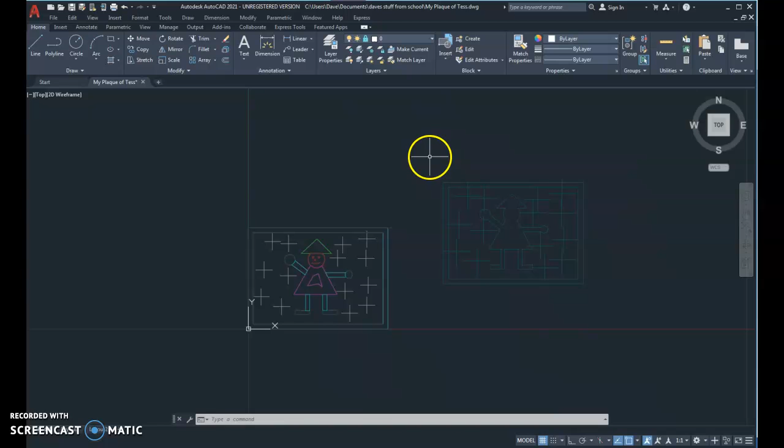I noticed that I had polar tracking on, so perhaps that was my error. So I'm just going to move this last one. You do the same thing for all the others. Right click, move it, grab the base point, roll in here nice and close, plunk it in the right spot, and roll back out, and that should be good.

So I have all of my layers now, and they're all on top of each other. I'm going to save this as my finished drawing. Remember, I already checked to make sure that all the toolpaths work. So, File and Save. Just waiting for that to come up.

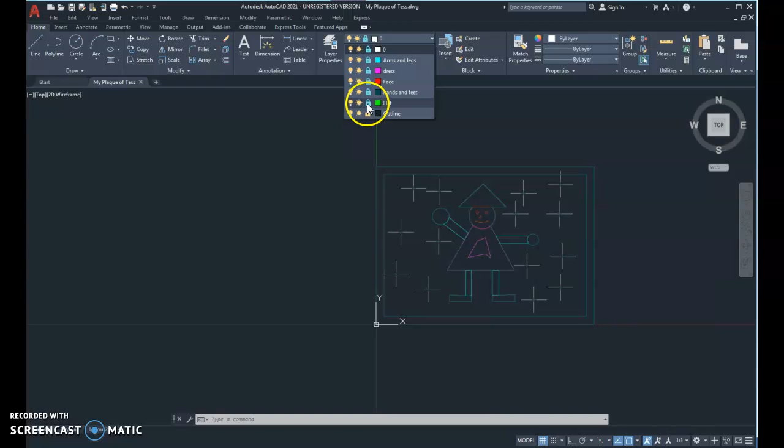So my plaque of Tess, I've got that all done now. I'm going to turn all the layers back on. I had them all locked just so I could move that last one on top. So there, now they're all unlocked.

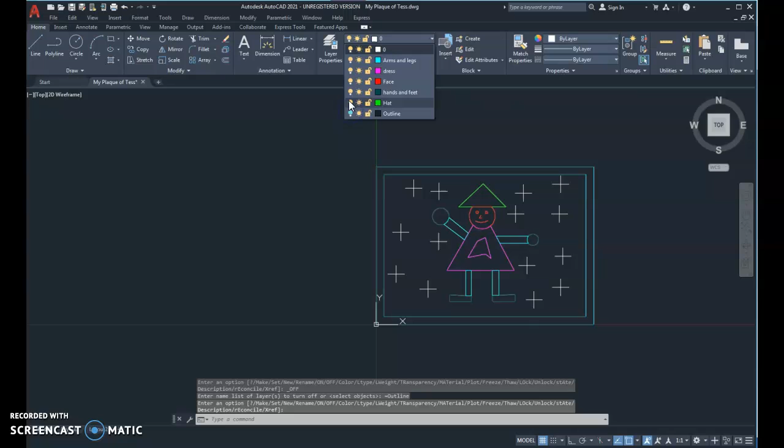I did want to mention something I forgot. You can lock layers here, and you can also turn layers off. I'm going to turn all the layers off except for the 0 layer, just for one reason. This is the original layer, the 0 layer, and we haven't touched this.

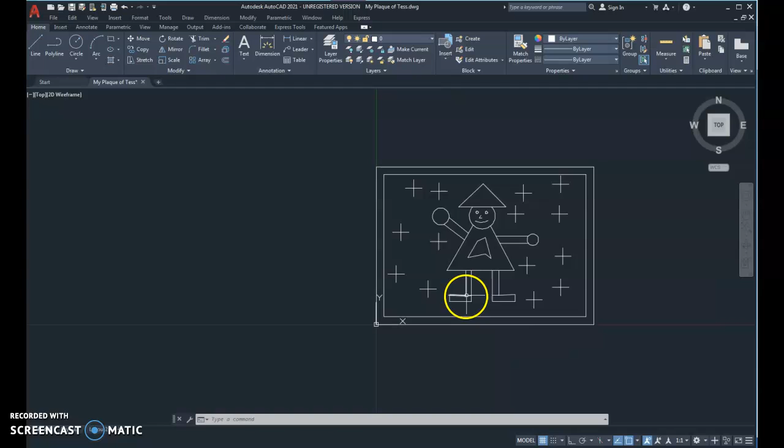One of the things you probably should do is check that all these areas in the face, any areas where I'm doing a pocket, that my tool is going to fit in there before I get to the point where I've checked all the toolpaths in Mastercam and split it all out into different drawings. I really should have said that at the beginning.

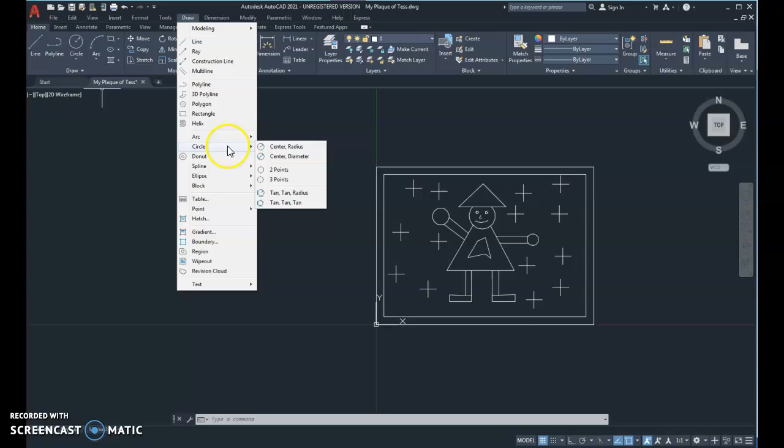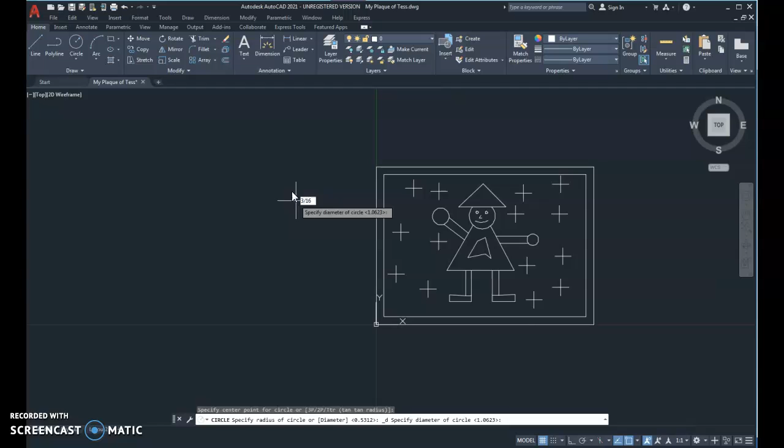So the way to do that is just to draw a circle, which is going to represent the tool. As I told you before, you can't pocket out anything if the 3/16 tool doesn't fit in there. So I'm going to click right here, and type 3/16, which is 3/16 of an inch, the smallest tool you can pocket with. Hit enter, and that is the tool.

And then I can take this tool, grab the middle, and check that it fits into these spaces in here. If it doesn't fit in the spaces that you want to fit it, then you need to make the space bigger, because you can't change the size of the tool. That's the simplest way to say it.

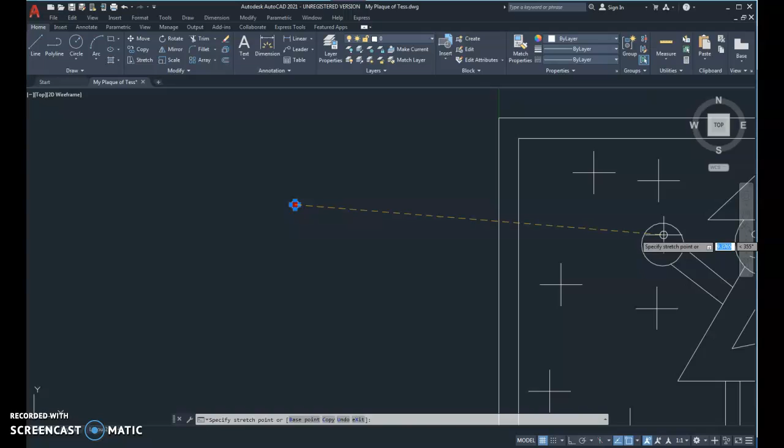So again, if it doesn't fit into the space that you are hoping to have milled out as a layer, then that part of the drawing should either be increased in size or perhaps changed to engraving, depending on the layer that it's on. Okay, so that's important.

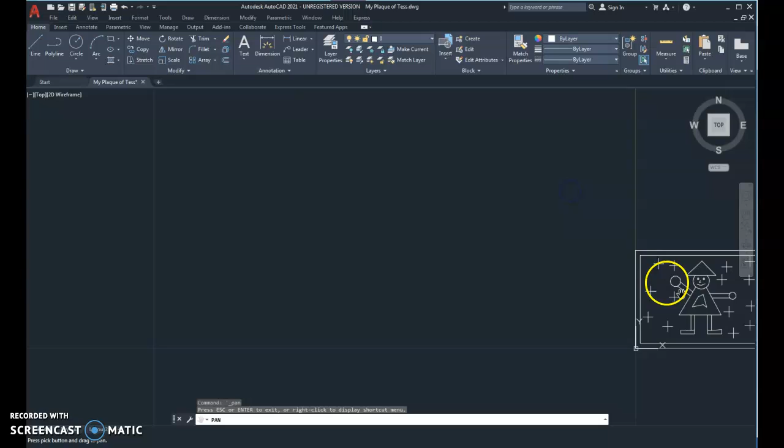So I'm just going to get rid of that, and I'm glad I talked about that. Okay, I'm going to turn all the layers back on. Hang on, I'm just going to pan back over. I right-click to get there, and then escape to get out.

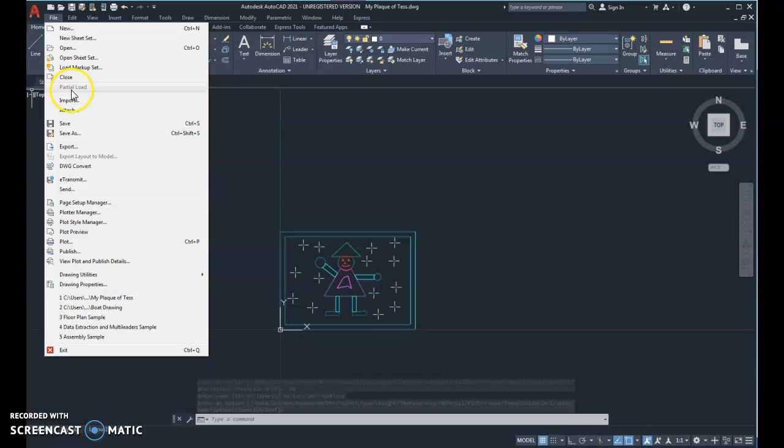I'm just going to turn all the layers back on so that I can bring them properly into Mastercam. All right, they're all on, and I'll just save that one more time. Save. Okay, great. All right, let's go back to Mastercam and work with this drawing of mine.

So there's my separated one, which has told me that all the toolpaths are good and work. I don't need any of this. It's not really right anyway, it was just done specifically for that one job.

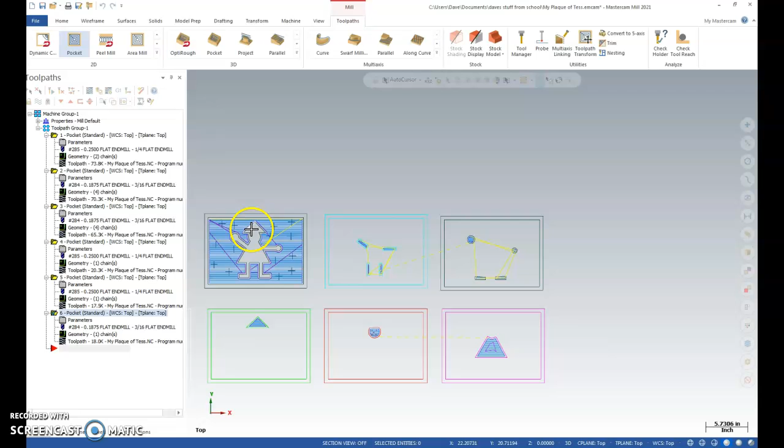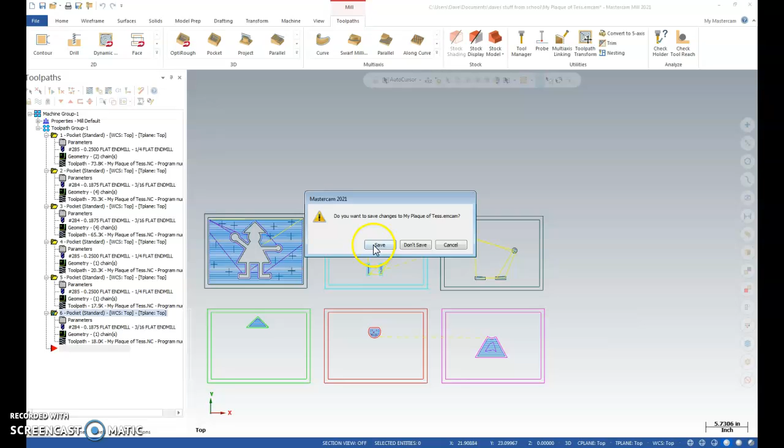So now I'm going to bring in the real thing. I'm going to bring in a new one, and get it off the computer. I've got some stuff for school, and there it is. So open it up. Do I want to save this one? Nope, I don't want to save this one. I'm just going to bring this one in. All right, great.

If you look down here at the bottom, you're actually going to see the word levels, and that's what we're going to work with in a few minutes, because right now we have 6 layers or so, and we just want to work with a few of them.

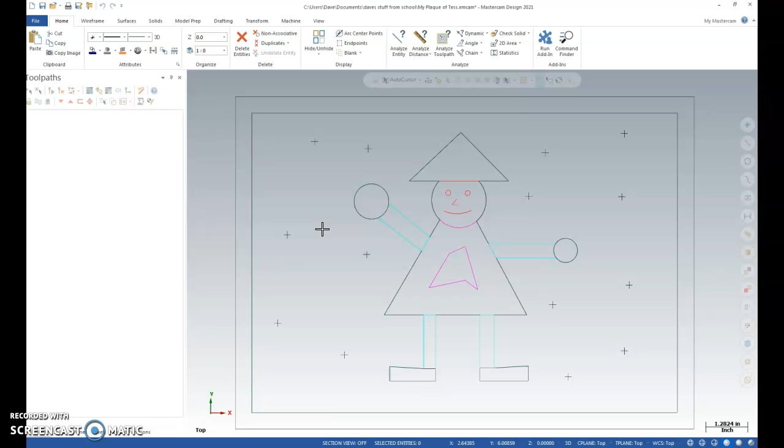So I'm going to come in here first, though, and remember to set up my machine. This is the real thing, so I'm going to go Mill and Default. And remember, this is my real one, so I'm definitely going to do the tool settings again, assign, sequentially, select, and I'm going to get wood out of the list here.

It's at the very bottom. We don't really have anything for foam. This is your mock-up checkbox.

So that's good. And then stock setup, same as before, you just hit display. That corner is 0, 0, 0, just like it was here. And I'll just put Y at 10, which is 10 inches, and X at 14, which is 14 inches, and the block is an inch thick or so.

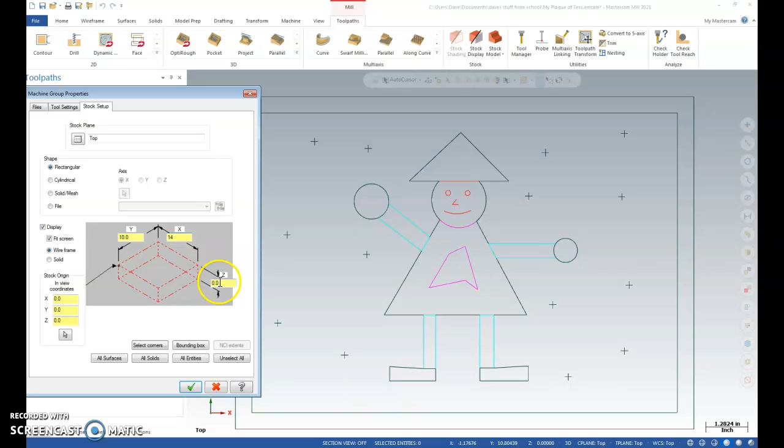Checkbox. There's my red boundary around everything. And the first thing is, now that I have that set up, I'm ready to do my first toolpath, but I can't do that because there are lines all on top of each other and it's not going to work.

So I need to come down to the word levels, and then I need to turn off specific levels. So I'm going to make them visible or invisible. So I'm going to make this not visible.

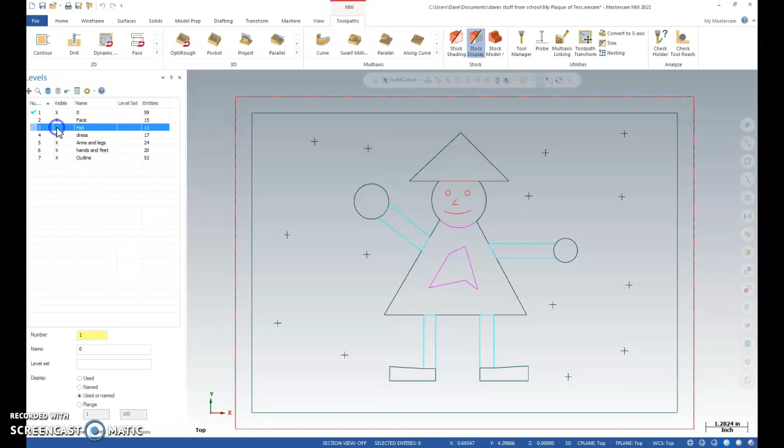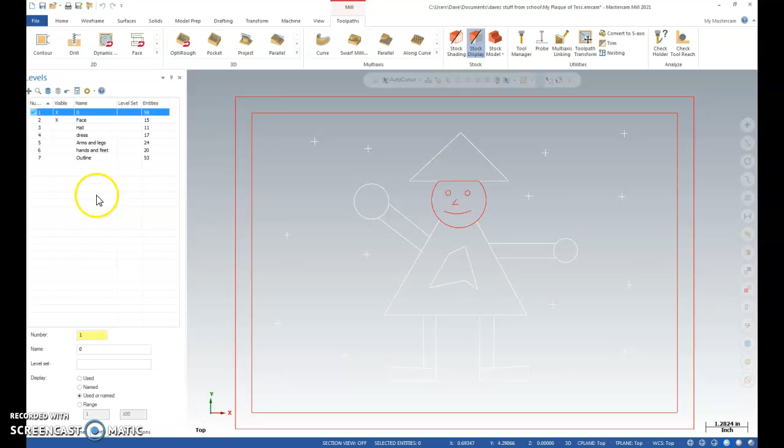And I just got to get rid of this layer too. So I think I have to make sure I... I know there's a way to get rid of this box. I think I can just make it there, right? And then I can turn that off.

Yeah, good. So the only layer I have on now is the face and the border. All right, just as an example.

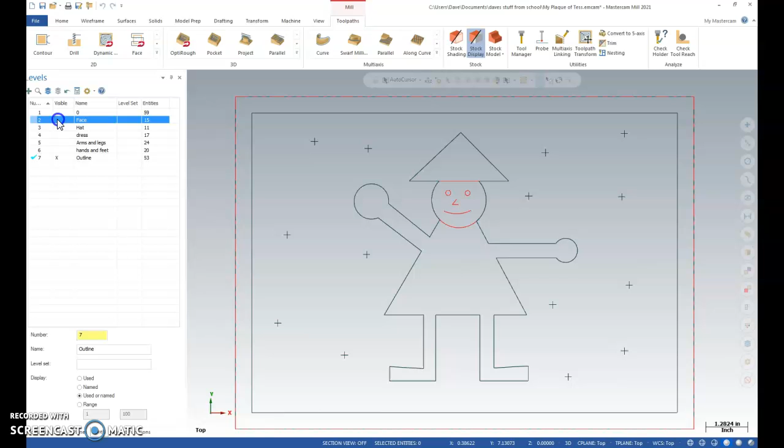Now, what I really want to work with first is the outline. So I'm going to take the outline, checkbox it, and turn off everything. So this is the first layer that I'm going to work with, because I'm going to pocket between here and the outline of my product.

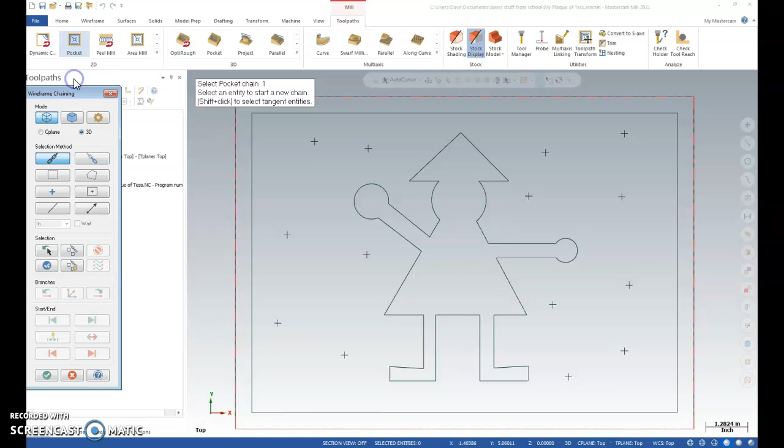All right, so here I go. I now have that ready. I can go back to toolpaths down here in the corner. And now I'm going to do my first toolpath, and as you may or may not remember, it is a pocket. So I'm going to do chain, I'm going to do the border. I'm going to do this guy.

Notice it's green, means I don't have any mistakes. I did a good job. I made a clean drawing. That's going to pocket out all the material in here.

So checkbox, and remember the tool. Go to the library. I'm going to grab the 1/2 inch tool. Checkbox. I'm going to remember to change the, while I'm here, I'm going to grab all of them, because remember, which is a good idea, 1/4 inch is tool 2.

And 3/16 is tool 3, and 1/8 of an inch is tool 4. This is critical because that's how it's set up on our machine.

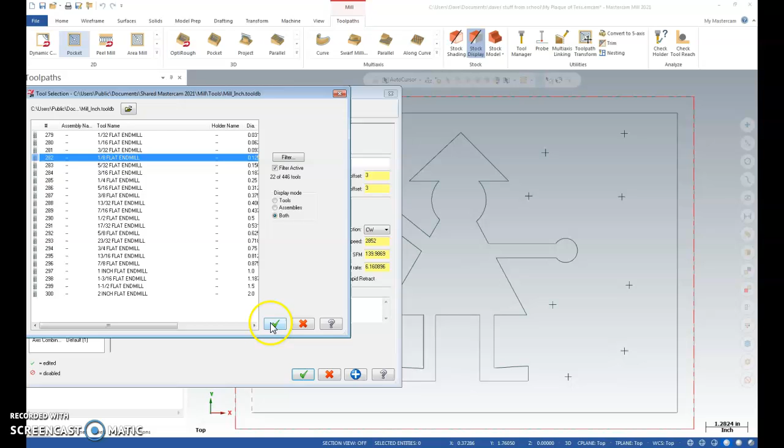I'm going to select the 1/2 inch tool, change the feed. Remember, for 1/2 inch it's 60, and then 10 is the plunge rate always, and 60 is the retract rate. And again, you could write some stuff in here about what tool you're using, and that you're doing the border and all the rest.

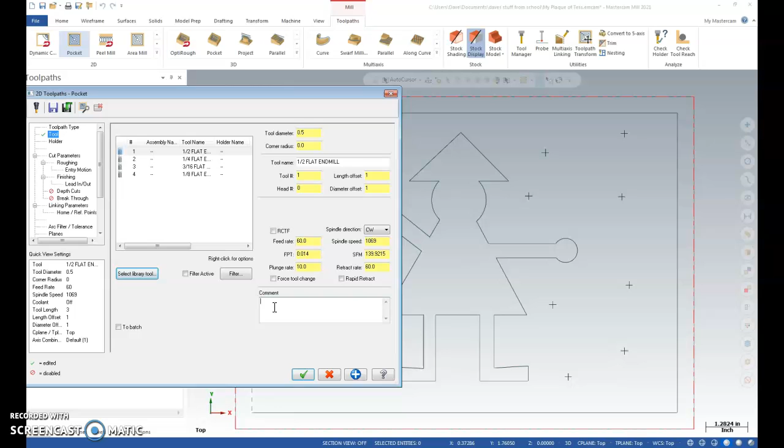We come over here to cut parameters, our first time through. Remember, I got to get rid of this. 0, 0. And then I got to go to roughing.

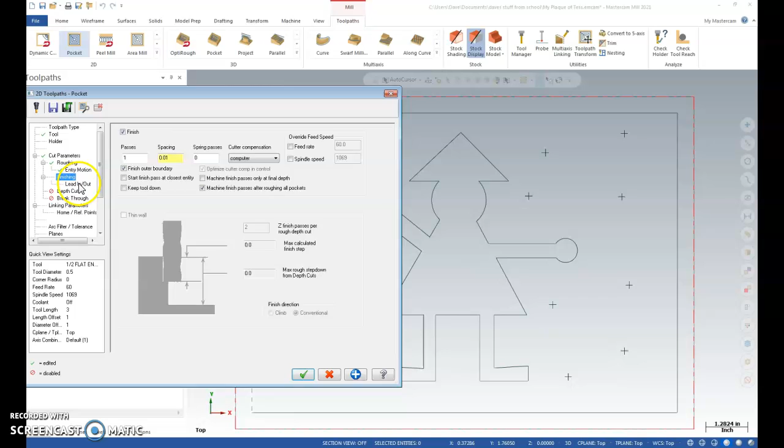Remember, pick zigzag is my pattern. Entry motion, I turn it off. You only have to do this once. Finishing motion's on, good, nothing wrong with that. And then lead in, lead out should be turned off.

And now I put in the depth. So this is minus 0.25. And checkbox. So there.